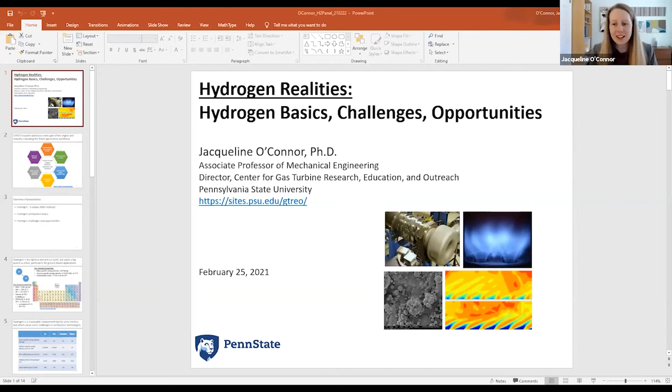Thanks, Jack. I'm going to quick share my screen here and go to my slides. Thank you, everybody, for attending. It's really exciting to be invited to speak on this extremely interesting topic of hydrogen realities.

Since I'm the first speaker, as well as one of the professors of the group, I thought I'd kick us off today by baselining and providing some foundations about hydrogen and some of the challenges and opportunities for integration into the energy space, so that we can go to Dr. Goldmere and Dr. Hoff and look at some of the more applied issues.

Before I go on, I want to introduce myself and my group a little bit. I'm the director of the Center for Gas Turbine Research, Education, and Outreach. We do research and development in a number of different areas, as you can see on the screen. But since we are a university group, our main focus is educating the future gas turbine workforce, with a particular focus on the graduate level. We do outreach as well, which is why I'm here today. If you have more questions or want to get in touch with us, please check out our website, down at the bottom.

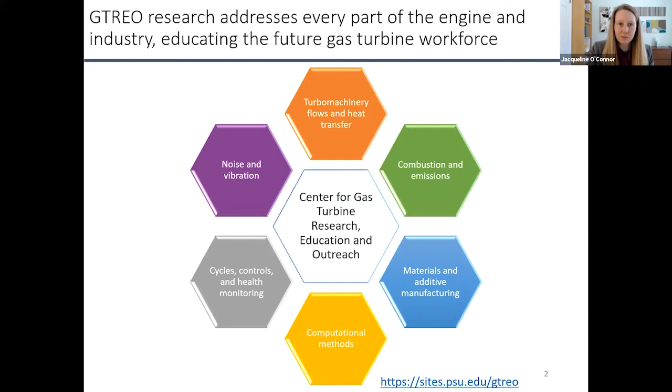So I'm going to talk about three things today. First, just a quick introduction to hydrogen. I'll give a shout out to a podcast I did with Dr. Goldmere a few months ago, the GE Cutting Carbon podcast. On my episode, we were talking about hydrogen and gas turbines, and I referred to hydrogen as a sneaky little molecule. I think that's a good way to think about it, because it has a lot of different connotations, which we'll talk about.

I'll talk about some hydrogen combustion basics. My background is in combustion, and that will set up our discussion for challenges and opportunities and some more of the applications that Dr. Goldmere and Dr. Hoff will talk about.

So let's talk about this sneaky little molecule. Hydrogen is the lightest element on Earth, but it packs a real punch as a fuel. On the periodic table, hydrogen is all the way up on the top left. In its natural state, it lives as two hydrogen atoms stuck together. There are some basic physical properties on the left, a couple that I want to point to. One is the boiling and melting points.

This goes to some of the storage issues that folks have raised about hydrogen—you have to cryogenically freeze it in order to get it into a liquid storage state. The other thing we'll come back to is this issue of diffusivity. Hydrogen, because it's so small, has a molecular weight of only 2 grams per mole. It can fit into a lot of different places, which means handling things like seals and valves that were designed for higher hydrocarbons, like natural gas, are not necessarily compatible with hydrogen. There are also a bunch of combustion issues that arise because of this diffusivity, which we'll talk about in a second.

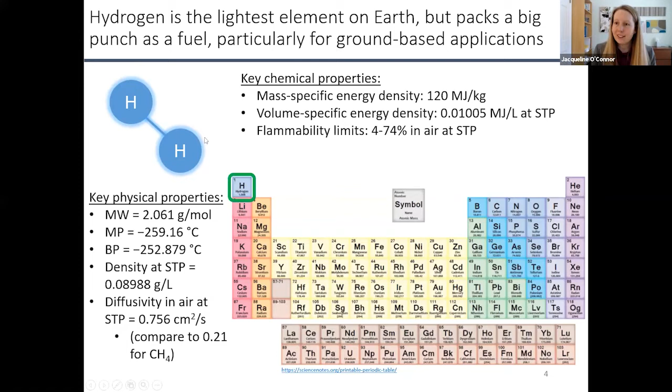This is a little bit scary from a safety standpoint, but also opens a lot of opportunities in the combustion space. Most hydrocarbons, except for something like acetylene, have a much lower flammability range, and so it's actually a great fuel to burn. The other thing, which I'm sure will come up in our discussions, is when you burn it, you're not producing any CO2.

So I thought, based on the technologies we're going to talk about today, it would be good to do a quick comparison compared to other fuels. I have hydrogen as compared to methane, which is mostly what natural gas is comprised of, particularly here in central Pennsylvania, sitting on top of the Marcellus. And then diesel and gasoline for transportation and some power generation applications.

So we already talked about its power density and the mighty little molecule. But some of these numbers on the bottom, mass diffusivity, adiabatic flame temperature, and flame speed, are all really critical for how hydrogen burns inside combustion technologies. Compared to methane, again the major constituent of natural gas, these numbers are quite different. Mass diffusivity almost four times that of methane, a 300 degree Celsius difference in adiabatic flame temperature, and almost an order of magnitude difference in flame speed.

As compared to diesel and gasoline, it doesn't really make sense to talk about mass diffusivity there, since these are liquid fuels. Hydrogen burns a little bit hotter than these heavier hydrocarbons, and again has a much higher flame speed.

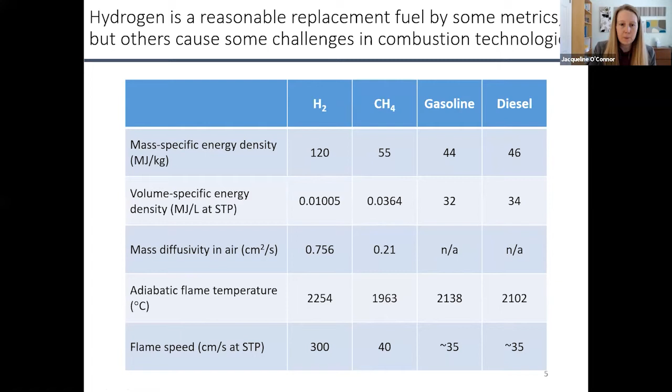And so what I want to talk about for the rest of my time here is what implications these really different physical properties have for combustion properties, and how hydrogen is going to work as a fuel in these engines. So let's start with adiabatic flame temperature.

The adiabatic flame temperature is a concept that tells you what the maximum possible temperature of a reaction is. Combustion reactions are exothermic, meaning if you add fuel and air, you end up with products and heat. More realistically, because it's exothermic, the products are at a higher temperature than the reactants. That highest possible temperature you can reach, if you don't have any heat loss or incomplete combustion, is this adiabatic flame temperature.

So, like I showed, for land-based power gas turbines, which is where a lot of my particular research is, the adiabatic flame temperature is about 300 degrees Celsius higher than that of methane or natural gas. And there are some challenges and opportunities that come with that.

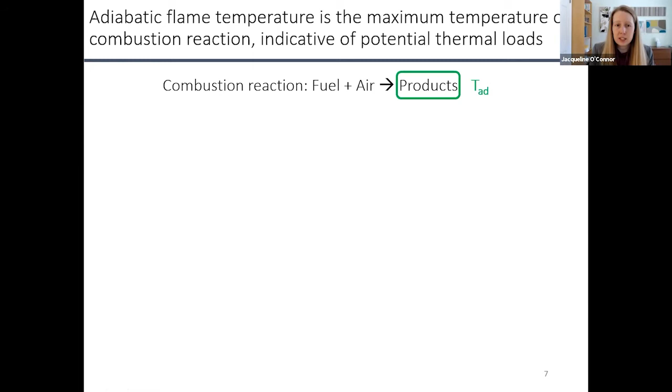And so if we can get the combustor to run hotter, which you could with a hydrogen fuel, then you can run your system more efficiently.

The problem is, and my many colleagues at Penn State who work in turbine aerothermal remind me of this on a regular basis, is that the combustor is not operating all by itself. There's hardware downstream, and that hardware is also spinning, which means there are not just thermal, but also mechanical loads on these parts.

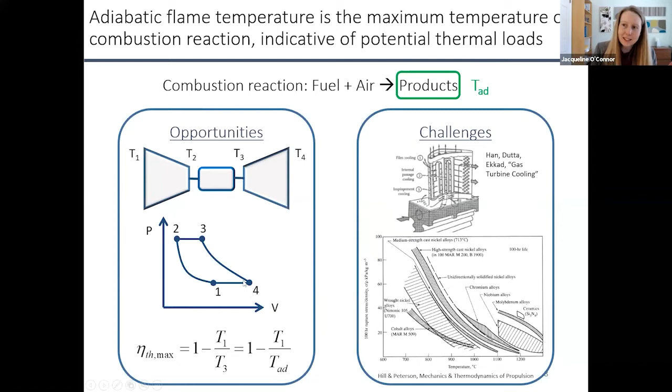From a heat transfer standpoint, quite a challenge. The other piece of this is flame stabilization, and this is getting much more into my own research. The flame speed, which I mentioned, hydrogen has almost an order of magnitude higher flame speed than that of natural gas fuels, as well as diesel and gasoline.

The flame speed is the speed at which flames propagate normal to themselves. I always show this when I teach Intro to Combustion. If you had a tube with fuel and air flowing through it and you wanted the flame to be stationary in that tube, you'd want the velocity coming into the flame to be equal to the flame speed. That matches what's called the kinematic condition. And so this SL naught, we call this the unstretched laminar flame speed.

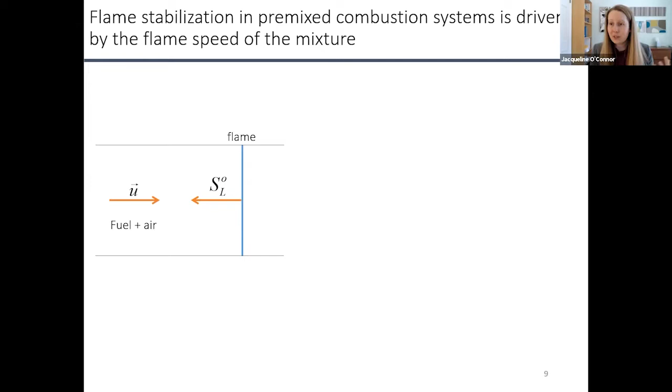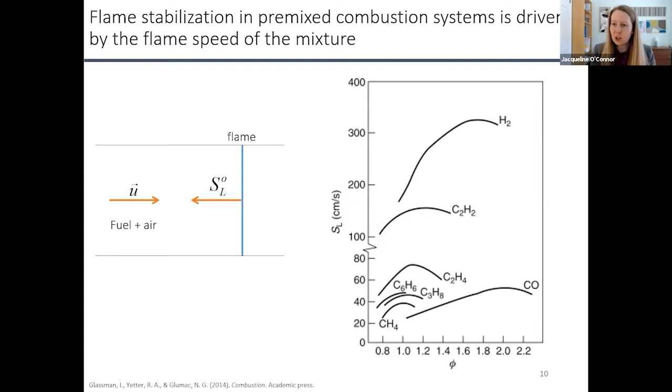So there are some real challenges associated with, from a combustion standpoint, replacing hydrocarbon fuels with hydrogen. I tried to be an optimist and think about opportunities associated with this, but I honestly couldn't come up with any. I just came up with challenges.

What you can see is that the main bulk of the flame moved closer to the injector because the flame speed went up. And this is not a whole lot of hydrogen. We could run this rig up to about 40% hydrogen before it got a little scary and we were afraid that the flame was going to flash back into the hardware. So even small changes in hydrogen can have dramatic effects in flame holding, which has other effects in terms of your durability and operability of your engine.

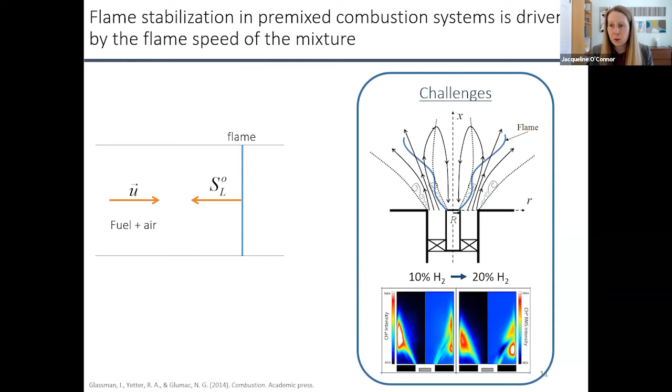So this is my last slide. I just wanted to bring up that last point. This is a bit of a shameless plug for the work that we do in my lab. All of these really fundamental properties of hydrogen, things like its diffusivity, its flame speed, its adiabatic flame temperature, have large-scale systematic implications in complex technologies like gas turbines and diesel engines.

So with that, I'll conclude.

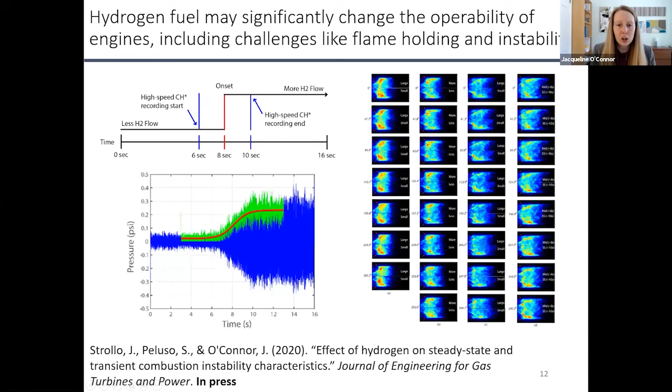All right, thank you, Dr. O'Connor. I appreciate that. That was very interesting.

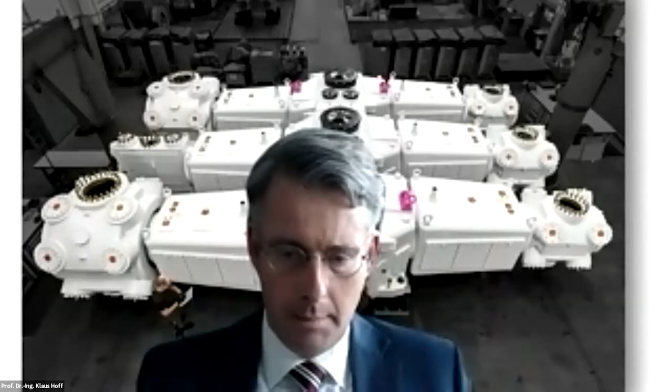I unmute first, then I share my screen. There you go. I hope you can see my presentation. Can you see that? Yes, I can. Yeah, fine, excellent.

My presentation will be about the appropriate compression principle for hydrogen. As a manufacturer of reciprocating compressors, we're very interested in that, since we think this future demand of hydrogen will help us keep in the business. I will explain in my presentation why I'm convinced this will happen.

First, I'll give you an overview of the compression principles available. Afterwards I'll show you some physical basics and the advantages and disadvantages, especially for centrifugal and reciprocating compressors. All the others, in my opinion, will not take a role in hydrogen - only these two compressor types will be part of this.

Then I'll talk about the efficiency and flexibility advantages of reciprocating compressors compared to centrifugal compressors, and at the end I'll summarize it. So, overview of compression principles - I've shown some pictures here.

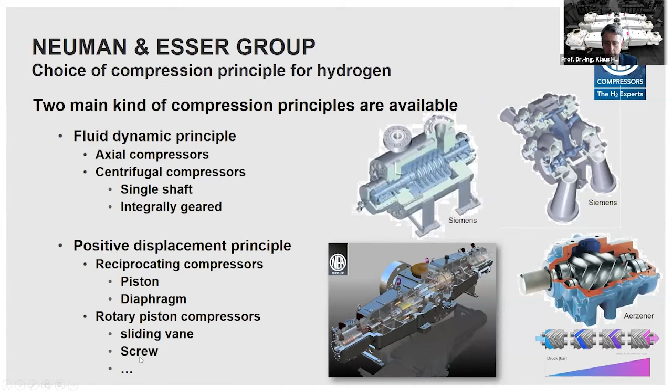But in principle, in all the other points and aspects, it's a reciprocating compressor. And then, of course, we have the wide field of rotary piston compressors. Here I just named the sliding vane compressor, for example, and the most important one is, of course, the screw compressor, as seen here in the picture.

Important for people who think about selecting a compressor, of course, is which pressure and which flow can I achieve with which compressor. First, I would like to say, especially for this hydrogen energy change, most likely it is not allowed to have oil in the gas. And this question must be answered first, of course.

By principle, the turbo compressor will never add oil to the compression, so the gas is oil-free. By screw compressors, it can or cannot be - there are oil-flooded compressors available and non-lubricated ones. So if the demand is non-lubricated, it is feasible.

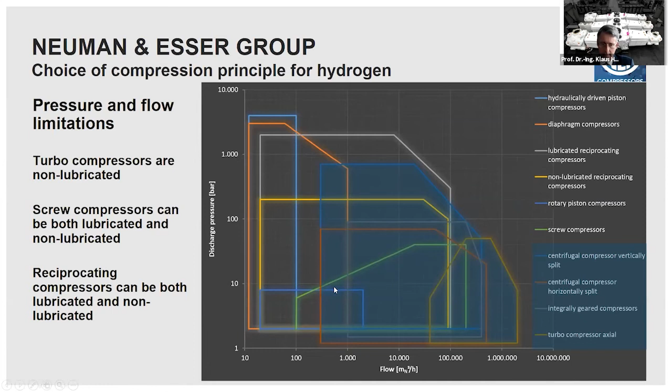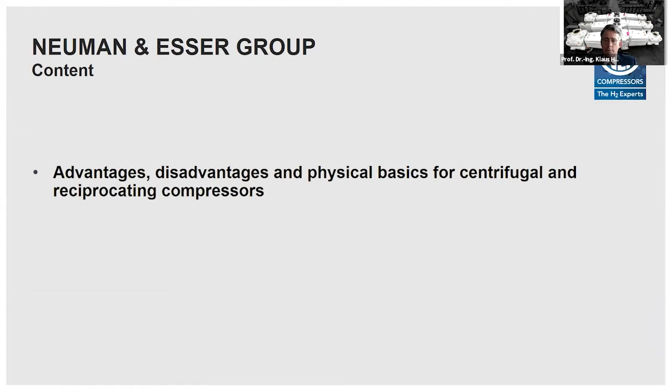What are the advantages, disadvantages - and I brought some slides to that - the physical basics for the centrifugal and the reciprocating compressors.

The advantages of positive displacement compressors: we can reach a very high pressure ratio per stage, very high. So from diaphragm compressors, you can reach even 7 or 8 as a pressure ratio in one stage. When you are looking for minor flows with an excellent efficiency, then the positive displacement compressor is a good choice. And when you are looking for perfect metering of the flow, then also it's a good choice.

And the next points are only valid for reciprocating compressors: you have the possibility of a perfect adjustment to varying suction and discharge pressure without any additional measures and without loss of efficiency, just by the fact that we use self-actuating valves.

So the compressor adjusts its behavior just to the suction and discharge pressure, and typically you have almost no loss of efficiency.

And of course, there's another important point. We have perfect options to control the flow without loss of efficiency. So if you have an application where you need to control the flow and would not lose efficiency, then the reciprocating compressor should be the first choice. That is especially true for hydrogen, because hydrogen is a very light gas and has the tendency to leak everywhere. For a reciprocating compressor, it's almost without any leakage.

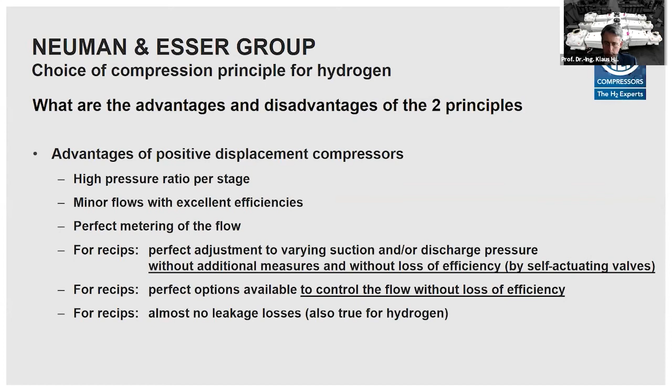Of course, the turbo compressor principle has a lot of advantages. So it's clear most of the compression principles which we see out in the field are done with the turbo compressor. The turbo compressor is really dominating the compression principle. That must be stated for good reasons. The turbo compressor has very small dimensions compared to the flow. We can reach really huge flows with reasonable compressor dimensions.

So just by the fact that the speed is so high, we can reach high flows. The flow itself is continuous, so we have no pulsation with low tendency of pipe vibration. This is an important point. People who are running compressors like the turbo compressors just for this behavior, because they never see vibration issues.

That is a difference to the reciprocating compressor. By the discontinuous flow of the reciprocating compressors, pulsation must be handled, and vibration is something you must take care of. Then, of course, there's no inertial load, so you don't need big foundations, and you have no tendency of compressor and foundation vibration. That is also a plus for this.

It's a very reliable machine with lowest maintenance effort. So typically in a refinery, a turbo compressor runs for 5 years without any interruption, 365 days, 24 hours. And after 5 years, they have the maintenance interval.

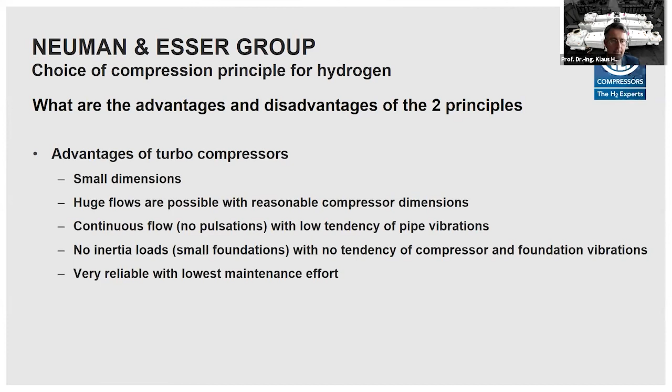Now, some formulas, not too much, but I just would like to share why is it difficult to compress hydrogen with a turbo compressor. In principle, you need three equations. The first one is the conservation of momentum, the so-called Euler Equation.

And here I just give a relationship. So the specific power, this is a power divided by the mass flow, is proportional to the impeller circumferential speed. So the higher the speed, the more power.

Then we need a relationship between the pressure differential of a stage and density and specific power. This is a combination of the first and second fundamental law of thermodynamics. So the pressure differential is proportional to the density and the specific power, and that means it is proportional to the molecular weight of the gas and the specific power.

And then we have another restriction to look for: these are the stresses in the impeller itself. It's clear high circumferential speeds will create stresses in the impeller, and then, of course, we have an upper limit there, and we have to be careful. Here the relation is the stress is proportional again to the square of the circumferential speed.

So there are two relations - either the one or the other is a limit. The first one is the pressure differential is proportional to the molecular weight and the speed of sound, speed of the impeller. This equation is the limiting equation when the speed of sound of the gas is low, because then typically we have to keep the tip speed below the speed of sound.

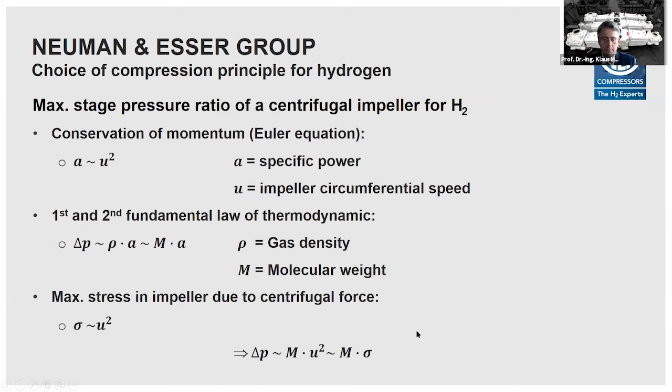And now, with this equation, you can create a relation between the pressure ratio of a given impeller, for example designed for air, and you can say with this impeller what is feasible, what pressure ratio is possible for a hydrogen application. That is a very simple equation - you just use the ratio of the molecular weight of hydrogen to air, and calculate it with this equation. Then you get the pressure ratio of the same impeller just used for a hydrogen application.

And here, just to give you a number, a typical tip speed of an impeller for an air compressor would be 280 meters per second.

The molecular weight of air is 28, and for hydrogen it's 2. For air, it is easily possible to create with one impeller a pressure ratio of 1.4. Applying that same equation for hydrogen, we only get a pressure ratio of 1.03, almost nothing. So when you try to compress hydrogen with this impeller, you need a lot of impellers to create a pressure ratio. For this example, you would need 12 hydrogen compressor stages instead of one air compressor stage to create the same pressure ratio of 1.4.

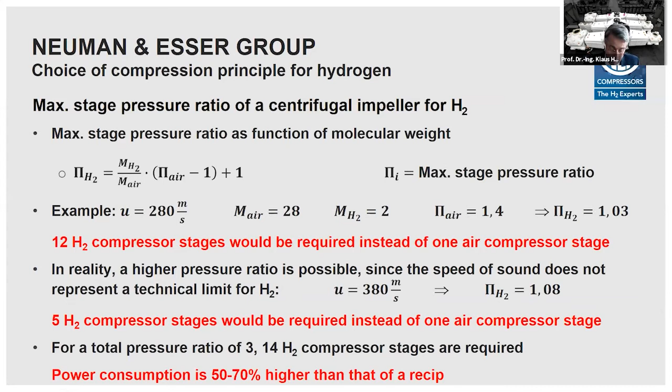And then there's another disadvantage compared to a recip. I can't share all the details here, it's too short a time, but you can roughly say you need 50 to 70% more power with a centrifugal compressor compared to a recip to create the same pressure ratio. And when you consider that in the end, in the hydrogen transition, we will need a lot of power for doing the compression, then this is a lot.

Let's come to the performance maps. Here on the left, you see the performance map of a reciprocating compressor, and on the right, you see it for a centrifugal or turbo compressor. These lines are lines of constant speed — here in this map, these are the lines. And what you can immediately see is that each and every pressure ratio can principally be reached with one and the same speed.

So there is no physical limit for the pressure ratio — well, there is a physical limit honestly, but no real practical physical limit. So you can reach every pressure ratio. You have to look at the discharge temperature, of course, and you have to look at the load capability of your frame, because high pressures will definitely create high loads and the frame must not be overloaded. But there is no thermodynamical limit.

This is different for the turbo compressor. Here in this performance map, you see the lines of constant speed. It's clear that when you need high pressure, the first thing is you have to increase the speed. With lower speeds, only a small pressure ratio is possible. When you need more, the speed must go up, that's for sure. And that is very important — there is a limit for turbo compressors, a so-called surge line. Beyond this surge line, you can't run the compressor because there are backflow conditions, and these conditions will destroy the impeller blades. So you must remain in this area.

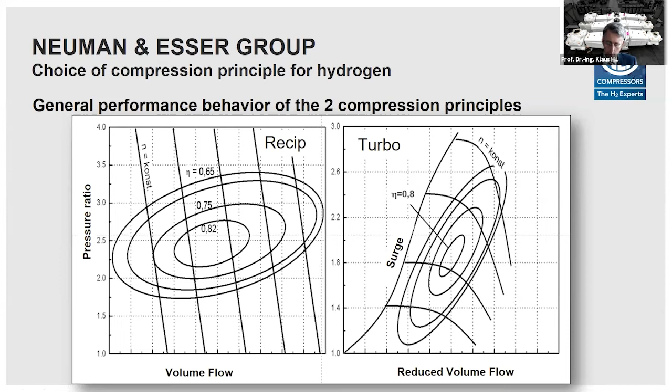This is not true for reciprocating compressors. There are other restrictions, mainly the load restriction, but they have no real thermodynamic restriction.

Some words on dimension. I think this is very easy, of course — it's not the complete story, but just to get an idea. The fundamental relation to understand the compressor size is the volume of a turbo compressor related to the volume of the piston. The volume I need at the suction side of the gas is proportional to the ratio of the piston speed to the turbo compressor speed.

And then some rough numbers: the speed of a recip is in the range of max 1000 RPM, and that's already the upper end. The typical big reciprocating compressor has lower speeds, but let's say even for bigger compressors this is the upper speed limit.

For turbo compressors, we are easily in the range of 15,000 RPM. So from that, the dimension of a turbo stage is 1/15 of a reciprocating stage. And that is the main reason why the turbo compressor is typically preferred, because you get a very small compressor for the same kind of compression task.

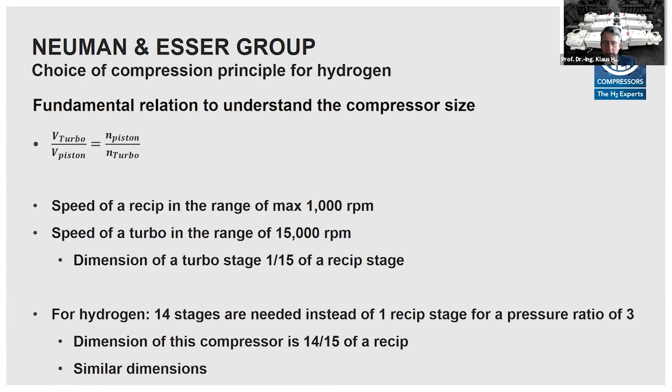But we learned for hydrogen, we need a lot of impellers. 14 stages are needed instead of one reciprocating stage for a compression ratio of 3. That means the dimension of this compressor is in the range of 14/15, because 14 impellers divided by the ratio of 15 of a recip. So the overall dimensions of a centrifugal compressor for hydrogen, in the end, they may be smaller, but they are on the same level.

Okay, then I come closer to the reciprocating compressor and will share with you some slides on the efficiency and the flexibility advantage of a reciprocating compressor.

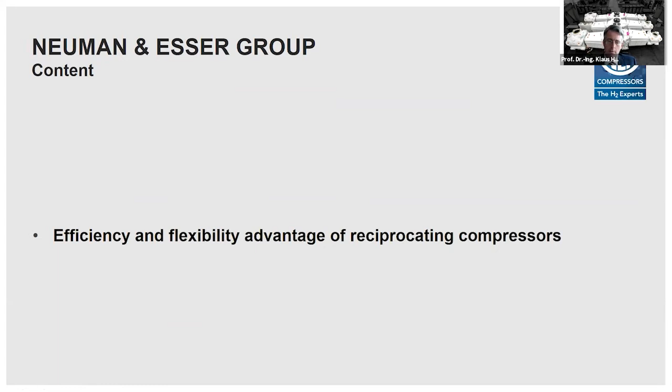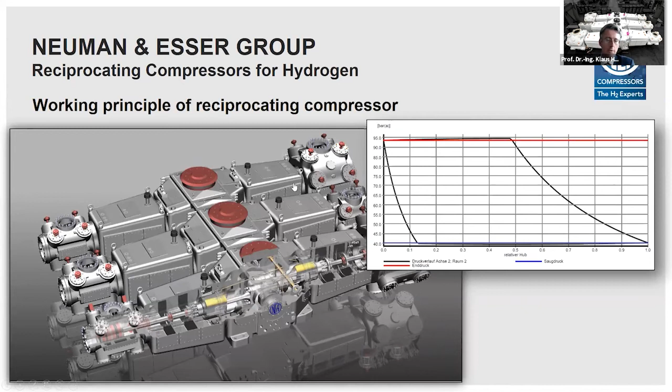The maximum possible flow would be this length, and the real flow is from here to here. So the ratio of this length to that length would be the volumetric efficiency. And the design task, of course, is to create the smallest clearance volume possible, because you improve the volumetric efficiency then.

Now, what are the main applications? We do this business for a very long time, and as long as gas is compressed, you need a compressor, that's clear. And as long as hydrogen is compressed, you need a reciprocating compressor. The main applications where we deliver the compressors are refinery, especially refinery, but also petrochemical and chemical industry. We have experience up to 700 bar.

And this statement is a clear statement: wherever hydrogen is compressed, it is usually a reciprocating compressor. For our company, I can state in the range of 80% of our compressors are used for hydrogen. And what we see, and that is good for us, there are new applications.

We see for the big compressors, if there is an energy transition, and hydrogen will, we hope, play a major role in the future. In Europe, there are tendencies to create a real hydrogen infrastructure, meaning pipelines just for hydrogen. Then pipeline compressors will be needed.

In addition, storage compressors will be needed, because wind and sun are fluctuating. So there is energy when there's much energy we don't need, and then when we need energy, there's no wind. So therefore you need the opportunity to store the energy. We hope this will be done by hydrogen, stored in so-called salt caverns, where here in Europe, in Germany, we have a lot of salt caverns currently used for natural gas, but there are clear projects to create salt caverns just for hydrogen.

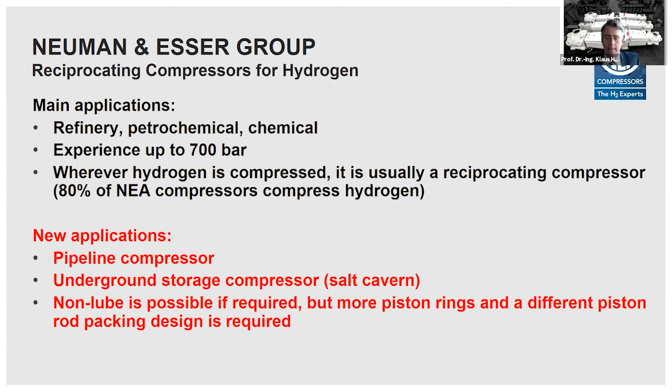As I mentioned, at least up to 200 bar, a non-lubricated solution with a classical reciprocating compressor is not a big deal, it's possible.

Here we had just an idea of the outer dimensions of such a compressor. This would be a pipeline compressor compressing from 25 bar to 75 bar. We can do it in one stage, pressure ratio of 3. With this compressor, you could easily reach a mass flow of, let's say, 44,000 kilograms per hour, or 500,000 standard cubic meters per hour.

Interesting, very high power, of course, 20.5 megawatt thermodynamic power. Then look at the mechanical efficiency, very, very high. So we have almost mechanical efficiency of 99% for such a big frame. So the power shaft is not much above the thermodynamical power. This is a big advantage of it.

And then of course, you have to add the electrical efficiency to get the electrical power. Typically, these compressors are run with the electrical motor, not with the gas engine. But of course, in areas where electrical power is not available, then you can also use a gas engine. Important is this number, the energy ratio - that means the electrical power I need to compress this gas from 25 to 75 bar related to the intrinsic power of the gas itself is only 1.5%. So you don't need too much energy to do the compression work in comparison to the energy included in the gas.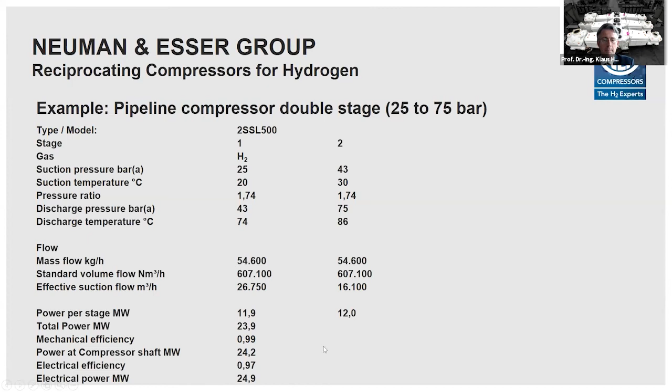But when you look at the efficiency now, at the example before, we had 79%. Here we got even 83% of isothermal efficiency. And when you look in the same performance map, the complete area has almost always the same high efficiency, 81 to 82, something like that. No point is below 80%. So the perfect efficiency wherever you are in this pressure range. You can compress whatever you want. The compressor is reacting by itself to the pressure ratio and remains high efficiency value. This is a very interesting point of a reciprocating compressor.

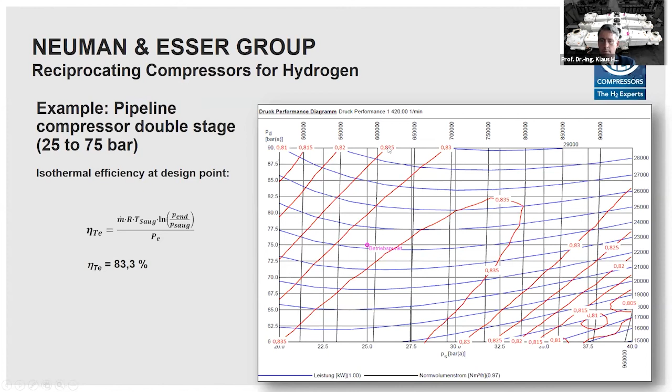And now here, this is a real example. Therefore, I added this picture. In Europe, there are first projects out for salt cavern storage of hydrogen. Here, typically, we talk about a suction pressure of 40 bar, and the discharge pressure for the salt caverns is typically in the range of 200 bar. So it's clear, the higher the pressure, the higher the density, the higher the energy you can store. So high pressure is needed, and 200 bar is not too low.

And for this application with this flow, this is a real project. So this drawing is made for a project here in Europe. We offered these two compressors, 8-throw compressors, two-stage. And just to give you an idea of the outer dimension of the complete installation.

So we have an installation for these two compressors of 60 meters by 40 meters, together with the coolers, which are placed outside. So just to get an idea how much place you need for such compression - of course, we talk here about 24 megawatt power per compressor. So this is a 50 megawatt installed power compression.

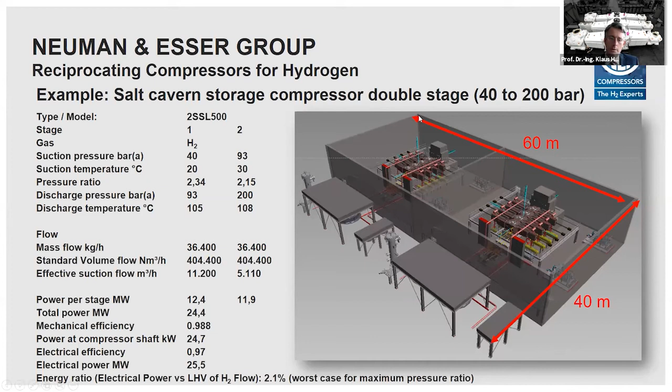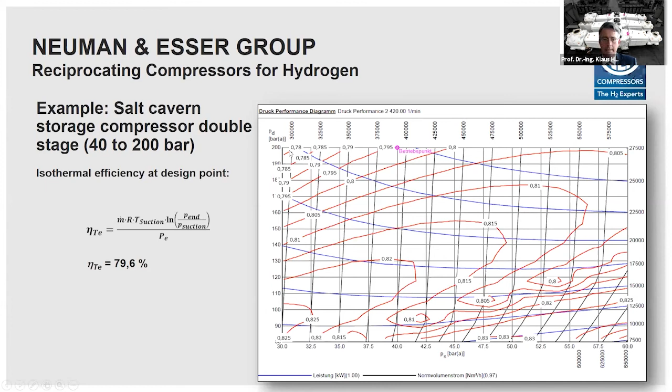And here you get again the efficiency map. Of course, the higher the pressure, the efficiency goes slightly down. But again, the efficiency is in the range of 78% to, let's say, 83%. So it's again in the range of 80% perfect efficiency.

Let's summarize my presentation. So I gave you an overview of the compression principle. Mainly I compared the positive displacement reciprocating compressor with the turbo compression principle. Physical basis, advantages and disadvantages were presented for the centrifugal and for the reciprocating compressor. And I showed you with the diagrams the efficiency and flexibility advantage of reciprocating compressor compared to all the other compression principles. This is not only valid in comparison to turbo compressors. This is, of course, also valid for screw compressor or whatever you need.

So wherever hydrogen is compressed, it is usually a reciprocating compressor, and we as Neuman & Esser can really state 80% of our compressors compresses hydrogen, and it would be clear without hydrogen, we have to look for another business model. That's it. Thank you.

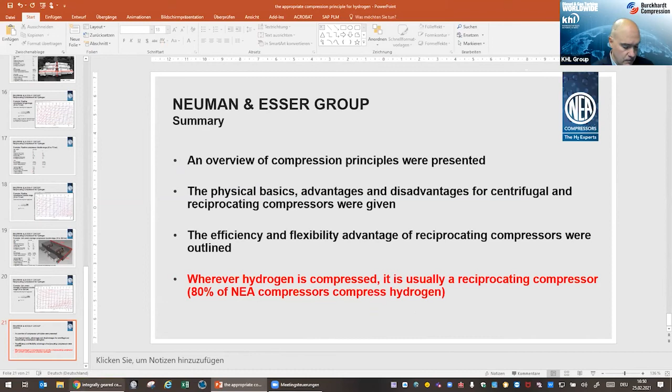I think you're muted. I just asked the previous presenter, Dr. Hoff, if he would kindly stop sharing so that Zoom will let me. What shall I do? Do I share my screen? No, you just need to stop sharing. It will not let me start sharing. Excuse me. Yeah, now I see it. Yes, I think now it will work. Excellent. Hopefully.

Thank you. All right. Well, good morning, good afternoon to everyone. I know we only have about 10 minutes left, so I will try and go through my material quickly. I've been paying a lot of attention to the questions that have been put up online, so I'm hoping to try and answer some of those as we go along, since we're not going to have a lot of time for Q&A at the end.

Just a quick overview. We're going to focus really on hydrogen, but I want folks to understand that as we talk about decarbonization, there are multiple paths. We can think of this in really two buckets: pre and post combustion technologies. Pre-combustion fundamentally means we're talking about a fuel that has either no carbon or a zero or net carbon kind of scenario. And then obviously there's post-combustion technologies to remove your CO2 emissions before they reach the atmosphere.

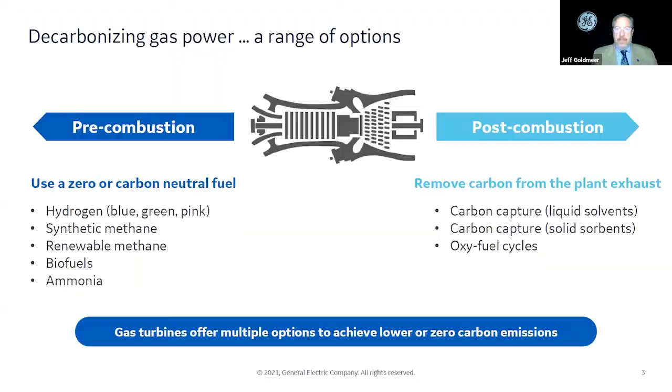So let's focus here specifically on hydrogen. Normally I would put in a chart that's got a lot of fundamental physical and chemical properties, but knowing Dr. O'Connor and the excellent job that she was going to do, I decided to take a different approach here. So just to highlight a couple of the properties that Dr. O'Connor had mentioned and really their implication for gas turbines.

She had mentioned how hydrogen is incredibly energy dense on a mass basis, which is true. But on a volumetric basis, it only has a third of the energy density, which means to have the same energy content going to your gas turbine, you have to have 3 times as much flow as represented by these spheres here, which means the fuel accessory system for a gas turbine has to be sized accordingly.

Dr. O'Connor did a wonderful job talking about flame speed. And the reality here in a combustion system, what that means is that flame wants to propagate upstream into the fuel nozzles. That's typically described as a flashback or a flame holding phenomenon. And again, the velocities of hydrogen, the flame speeds, are an order of magnitude faster. So you really have to have a combustion system that's configured for that kind of challenge.

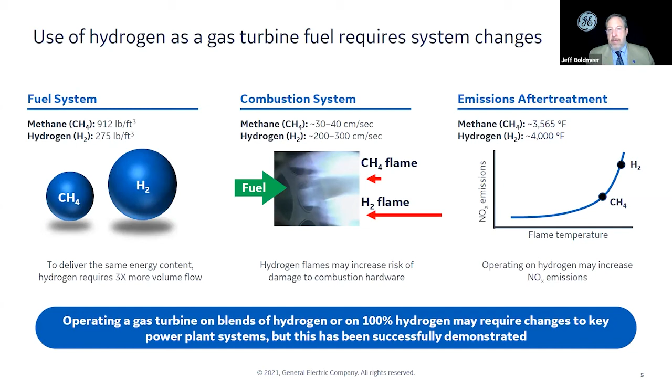The other thing to realize is flame speed is a surrogate for reactivity. So it's not just that hydrogen is going to move faster, but the reactions happen so much quicker. So again, your combustion system has to be configured for that. And then as Dr. O'Connor again mentioned, the adiabatic flame temperature is hotter. There was a question asked about NOx, and yes, you will see upward pressure on NOx emissions when you put more and more hydrogen in a gas turbine, because you will start to get incremental increases in NOx.

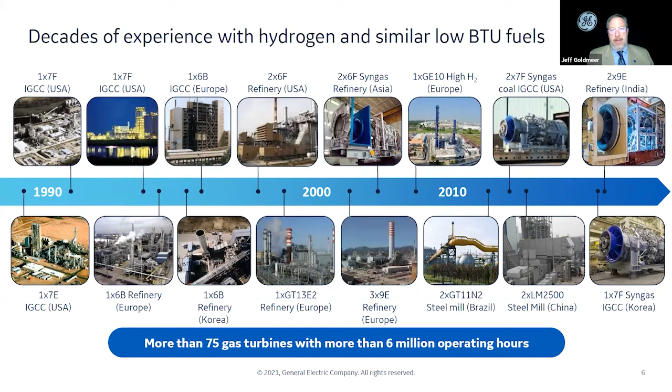So you can burn very high amounts of hydrogen in a gas turbine even today. What I want to point out here is a couple of specific examples around the kind of activities you can do. You can think of this in 3 buckets. The first bucket being, what if you have an existing gas turbine and want to start putting hydrogen into it, but you didn't think about that from the beginning?

Here's an example in that first picture on the left-hand side. We had a customer here in the US who had 7F gas turbines, notionally 180 to 200 megawatt units. They had hydrogen available to them because they were kind of a petrochem site. So we retrofitted the system. We provided 4 fuel blending systems, 1 per gas turbine, that allowed them to blend hydrogen into the natural gas supply at site, roughly 5% by volume hydrogen to those gas turbines, which they ran for many years.

So you don't have to have a gas turbine configured for running hydrogen at day 1. That's a capability you can add to a system. I talked about the demonstration project we did at 100% hydrogen, but it was a demonstration, not a plant that was in commercial operation for a very long time. But we do get asked, is this something you can do commercially? And the answer is yes.

So the middle picture here shows a 6B gas turbine, roughly a 44 megawatt turbine. It's been operating basically on a fuel that effectively could have either been thought of as a waste fuel that you might flare, or a fuel that you maybe would try and make power with. This is a fuel whose hydrogen composition has ranged between about 70% and 95%. This gas turbine has been running on that fuel for more than 20 years. When we checked on the plant this summer of 2020, the fuel had about 85% hydrogen by volume. So you can configure a gas turbine plant to run on very high levels of hydrogen.

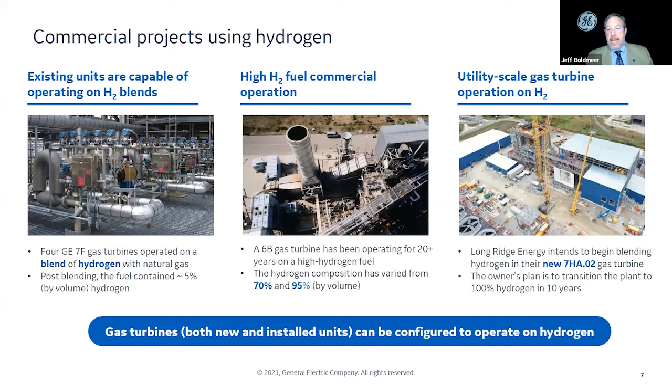Normally I would spend more time on this slide talking about some of the specific pieces here, because you have to think about the use of hydrogen in a power plant, not just for the gas turbine. You have to think about the entire power plant. How is the hydrogen coming to you at site? You have to think about the accessories, how you're piping that hydrogen to the gas turbine. We have to think about things like hydrogen embrittlement, hydrogen diffusivity. Is it going to leak through seals? So you have to have the right seals, the right steel alloys, the right material to limit embrittlement issues.

Hydrogen: typical gas sensors in power plants are not configured for hydrogen, so you have to make sure your safety systems are appropriately configured.

We talked a little bit about the gas turbine. Again, a comment being asked was around NOx emissions. You will see from the gas turbine, depending on how much hydrogen you're burning, incremental NOx.

But there are ways to deal with it at the power plant level because there are existing technologies. Many power plants around the world run with a NOx emissions after-treatment system, using a catalytic-based system. The industry term is SCR, selective catalytic reduction system, and that's an industry standard. So there's no reason, if you start using more and more hydrogen and have increased NOx, not to use one of those systems.

The challenges could become, if you have an existing gas turbine, there may be some limits on that system, but there are other things we can do in the gas turbine. So NOx emissions in and of themselves should not be a reason not to use hydrogen as a low carbon fuel.

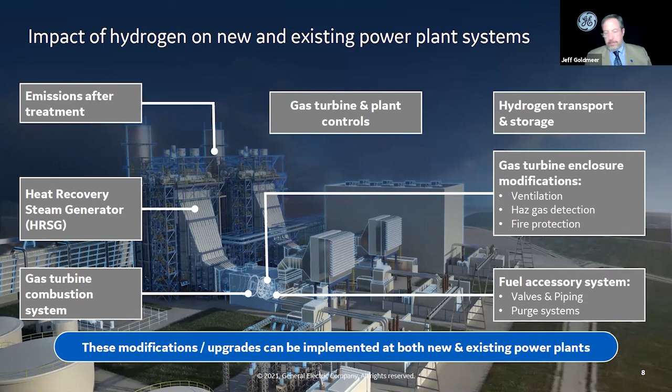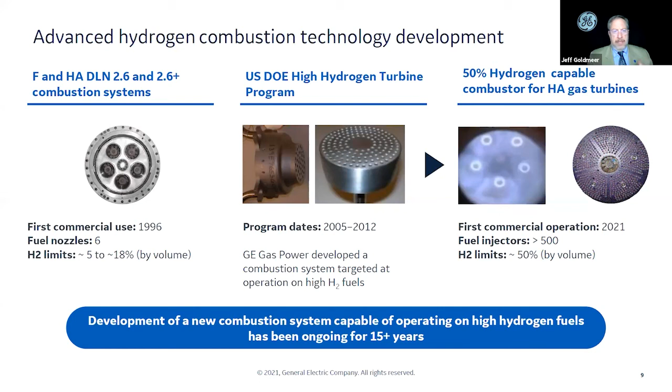Just going to speed through here, two seconds on this page. There's really lots of incredible technology development happening in this space. One thing I'll mention is GE has technology we've developed over 15 years with support from the US Department of Energy—this combustion system on the far right, a new way of injecting fuel and air. If you're interested, I have an article published earlier this year in Turbomachinery International that goes through this. There's a lot of great literature out there published by ASME and others, and lots of great work done by academia as well as the various OEMs looking at new combustion technologies.

What I really want to focus on here in my last minute or so are two things. In order to really leverage hydrogen, we have to solve this trilemma. You have to produce it at scale, at a cost that's competitive with other alternatives, and you have to think about infrastructure, transportation and storage.

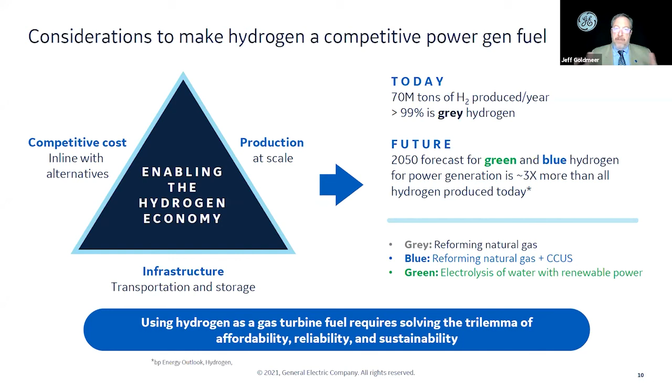I really appreciate Dr. Hoff's comments, his lesson on compression, because you have to be able to move and compress hydrogen. One of the tricks, however, is the existing pipeline infrastructure for gas cannot handle 100% hydrogen—there are significant limits on that. So we have to think about what the overall infrastructure is, and how to solve this problem of making it at scale and moving it, regardless of whether you use it for power or transportation or such.

I'll leave you with one final note, and then maybe I'll turn it over to you, Jack. I went through this very rapidly. If you're interested in learning more about what GE is doing, we've got a real focus on what we call the future of energy in a decade of action. There was a white paper specifically focused on that, and there's a QR code that makes it available.

As Dr. O'Connor said, we were thrilled to have her as a guest on one of our podcast episodes. Our podcast is called Cutting Carbon, and it focuses on the energy transition and the issues we face as a society. We're actually preparing episodes for season 2 that'll focus on hydrogen and carbon capture. It's a really exciting time—it's a real societal challenge. In fact, it's the challenge of our generation to really take this on as a priority.